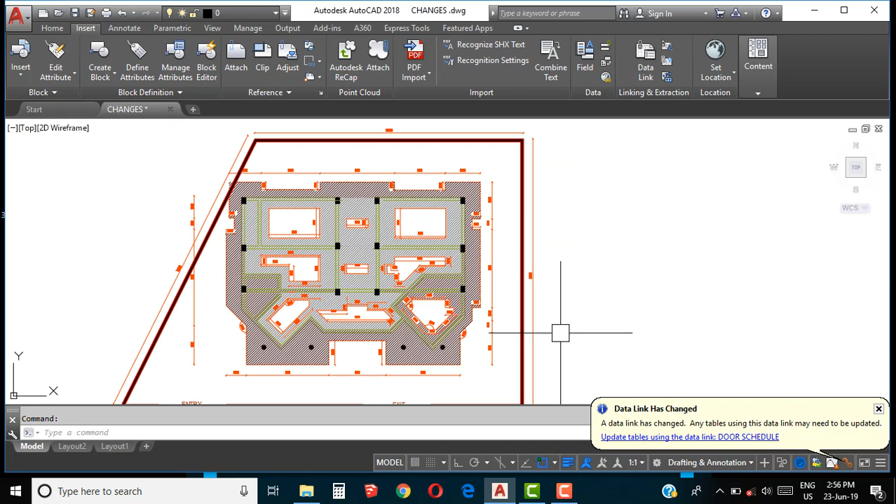Open your drawing which you want to be on scale. I want this drawing and another is this one. I want this table on another scale and these both drawings on the same scale.

So what I will do is first go to the layout here. This page should be on A1, I want it on A1. So I will set up my page setup in A1 sheet.

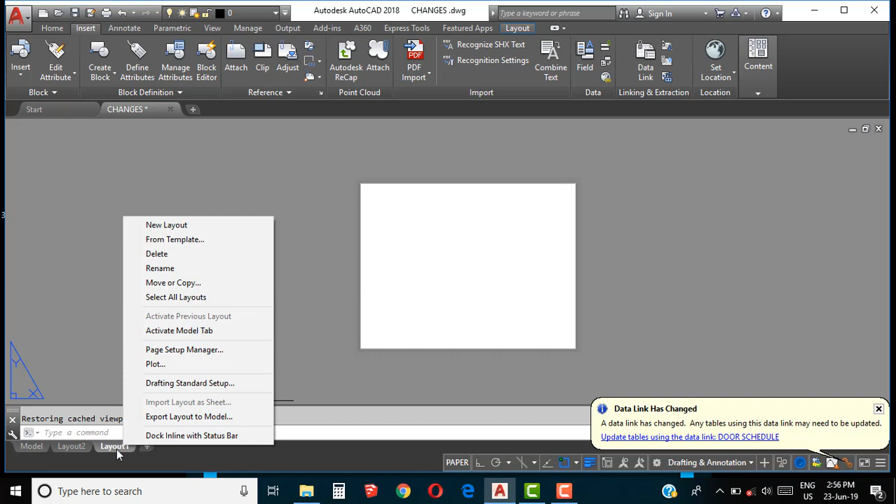Right click and go to page setup manager. Click on modify, now you need to do the page setup. First this should be in DWG to PDF. Here my page I need is ISO full bleed A1.

It should be in landscape, so I will put 841 in front, 594 in the second one. Here it's layout, and the main thing which comes is the mm and the unit.

My drawing is in meter, so I will put 1 unit equals to 1000 mm. If my drawing should be in mm, then I will put 1 unit equals to 1. If my drawing is in meters, I will put 1 unit equals to 1000 mm. That's it, my page is set up.

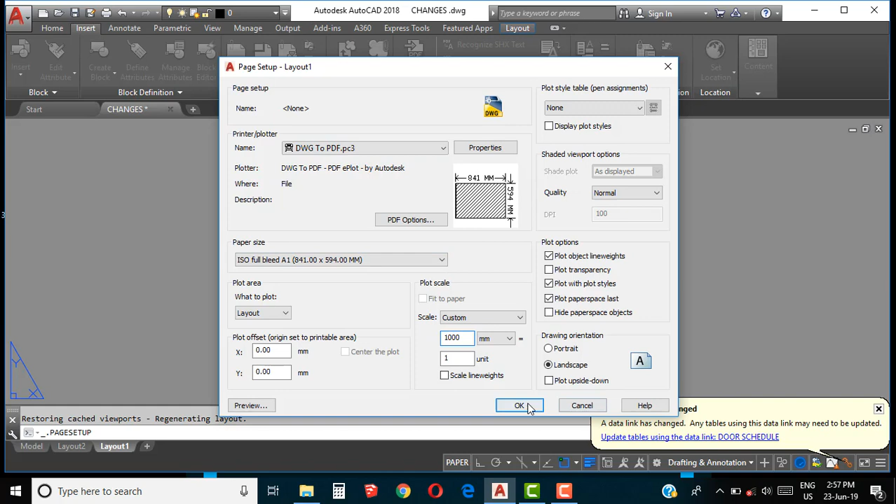Now click on OK, it should be closed. This is my A1 page.

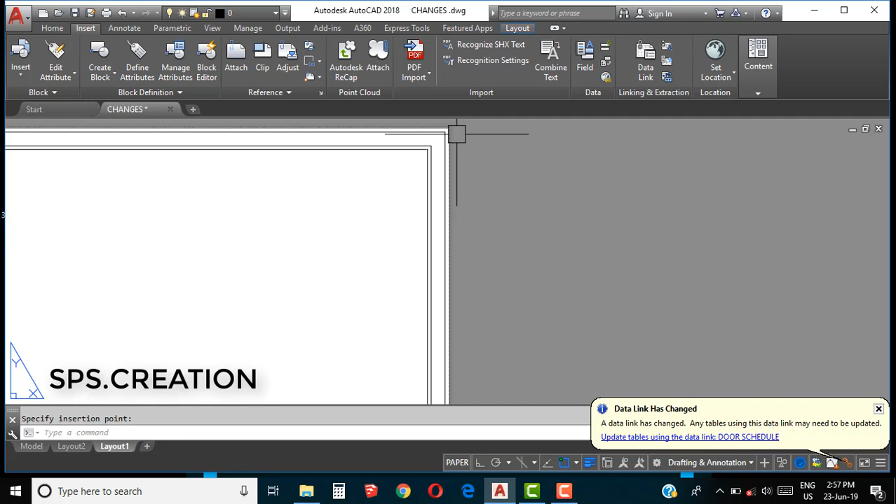Now what I need is the format. I already made a format for A1 page. You can also get it, or if you want this format of mine, you can contact me on Instagram, my ID is sps.creation. It's settled and it should be into the dotted lines.

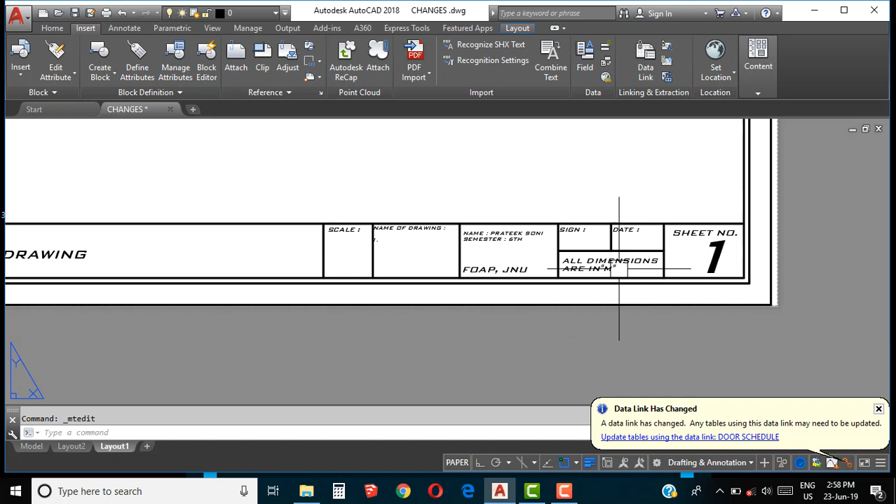Here my page is set up. Now you can change the drawing names from here, just double click on the text and I can edit it by double click. You can write the name of drawings, the scale, your name, semester or sheet number, your scale, sign, date and the sheet title.

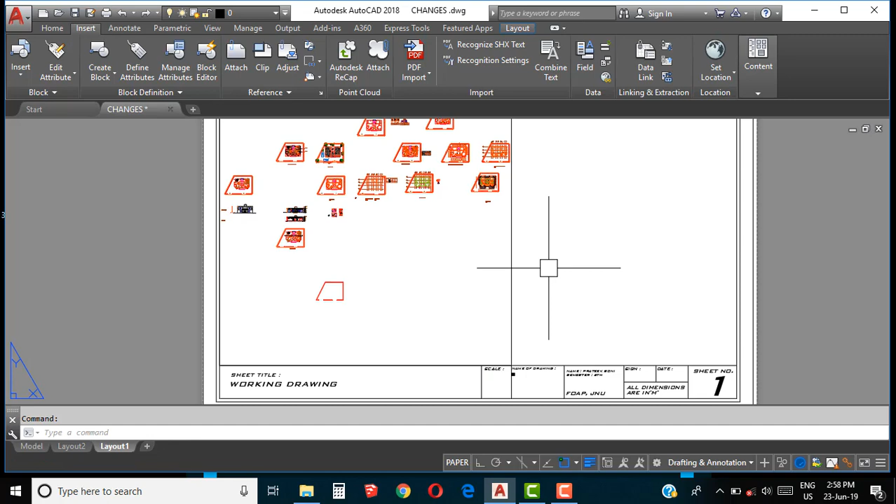Now what I need is the drawings on scale. So what you need to do is write VPORTS and click enter. Now click OK. Now create a viewport where you need your drawing to be. To enter the viewport, double click on it.

I need this drawing on scale, it should be near to 1 is to 100. So I got it on 100 scale. Always put this box on the Defpoints layer so that it is not visible on your sheet at the time of printing.

Now create next viewport, VPORTS, click on OK, create another viewport. Double click, enter into the viewport.

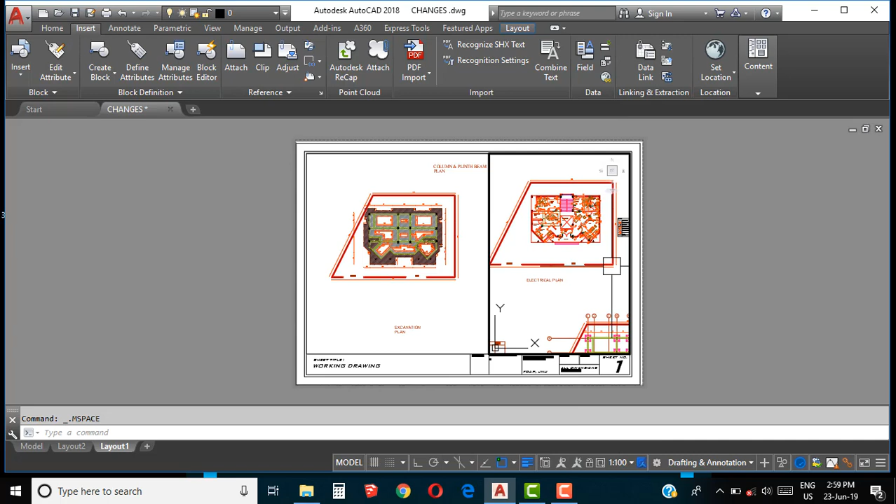Now what I need is this sheet, it should be on 100 scale. I got it on 100, but what I need is to double click outside. Now select the viewport, make it small as needed.

Now I need that table on another scale. Create another viewport, click on OK. Here it is, double click.

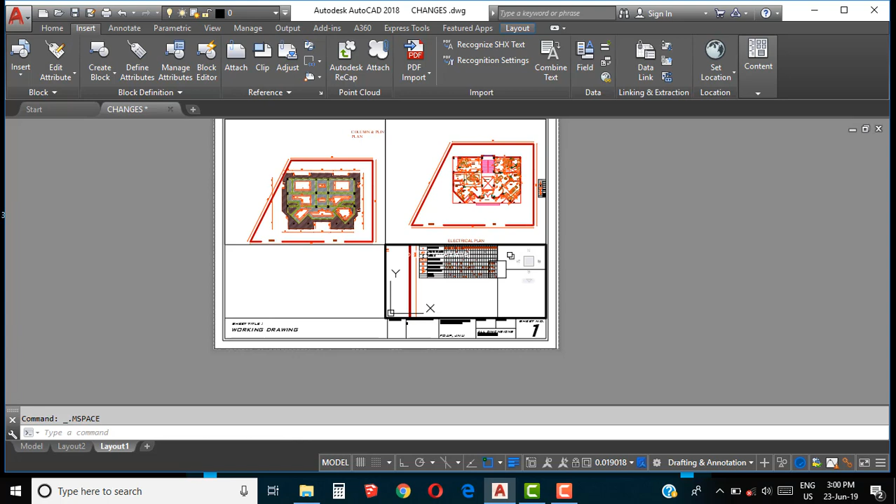Enter into the viewport. Now I need that onto the scale of 1 is to 50. Here it is, the scale of this table is 1 is to 50. The scale of these both drawings is 1 is to 100.

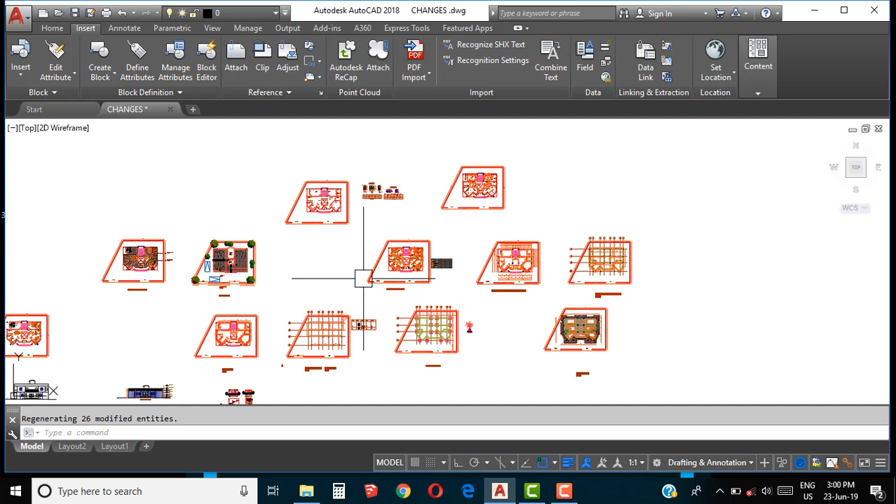Now what you need to do is, I don't want these plain lines, so I will go to the model space. The drawing is this one, I will shift the drawing.

Now when I go to the layout, it's shifted. Now I double click to activate the viewport, double click outside to make it off. Again set your page. Hooray, you did it.

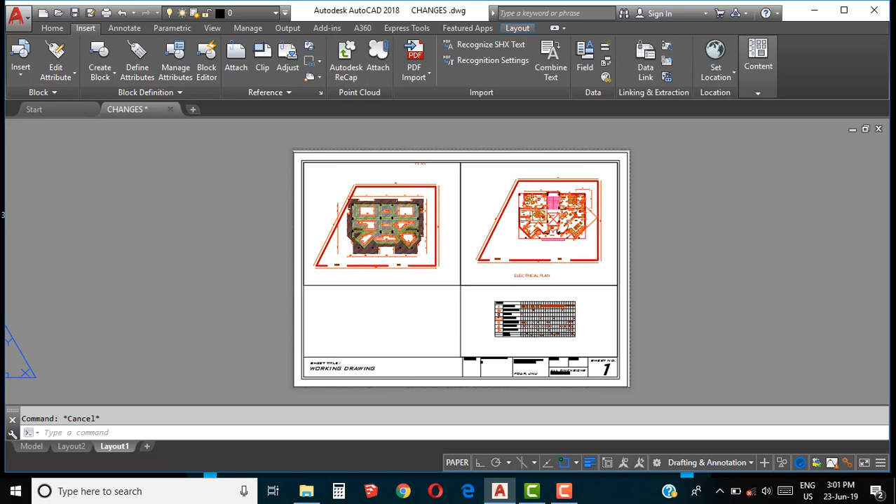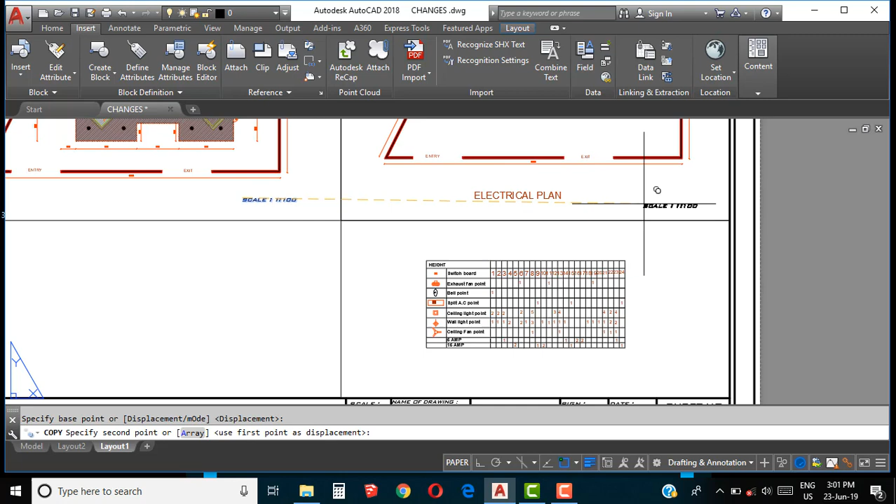The scale of this one is 100. You can write the scale here also. The scale of this sheet one is 1 is to 100. The same scale is here, the scale is 1 is to 50.

So that's it. Now if you want to print this out, you just click on Control P. Here the page is already set up, you don't need to do anything. Click on OK, just desktop and save.

Hooray, you did it. You got the print on 1 is to 100. Have you seen that I did not put these both viewports on the defpoint layer, so these are still visible.

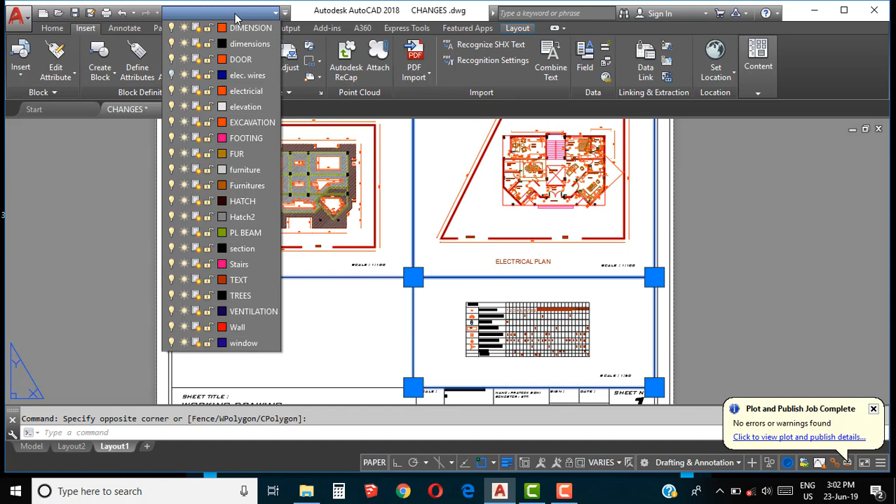Go to the PDF, select all of them, click on defpoint. Now all these viewports are not visible in the print. Click on OK, okay, yes, overwrite.

Here it is, we got the drawings on scale. This is on 1 is to 100. This is on 1 is to 50. This is on 1 is to 100.